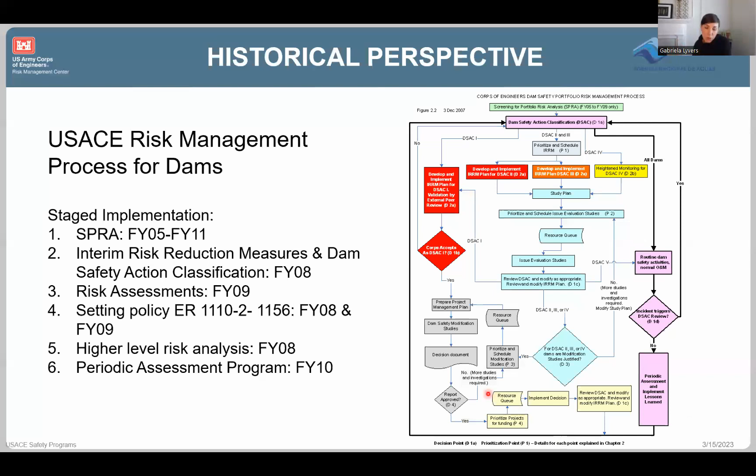So again, this flow chart, you can look at it. We can make these slides available to everybody. It really steps you through that process of managing your risk on a program level where you continuously assess your inventory of dams. For us, it was a 10-year cycle. And then you establish what the DSAC classification would be for that dam, which is the Dam Safety Action Classification, which allows you to rank the dams in level of priority so that you can prioritize actions, resources, funding, and higher level analysis.

So like I said, the purpose of the screening for portfolio risk analysis, I'm going to switch and call it SPRA from now on. The purpose of the SPRA was to perform a screening of all 715 Corps of Engineers dams to gather information and establish a relative ranking of risk within our portfolio.

Dams would be classified based on the Dam Safety Action Classification chart from a 1 to a 5, where the DSAC 1 dams would be of highest priority and highest risk, and the DSAC 5 dams were deemed to be a normal risk dam and of the lowest priority for action. This classification would allow us to determine future budgeting and resourcing needs, and would help us establish a program and an action for the years to come for the higher level of analysis, the periodic inspections and assessments, and all those follow-on action items.

All dams were screened with the same methodology. And today I'll go through the steps of what that entailed and how the Corps of Engineers used that information to make decisions.

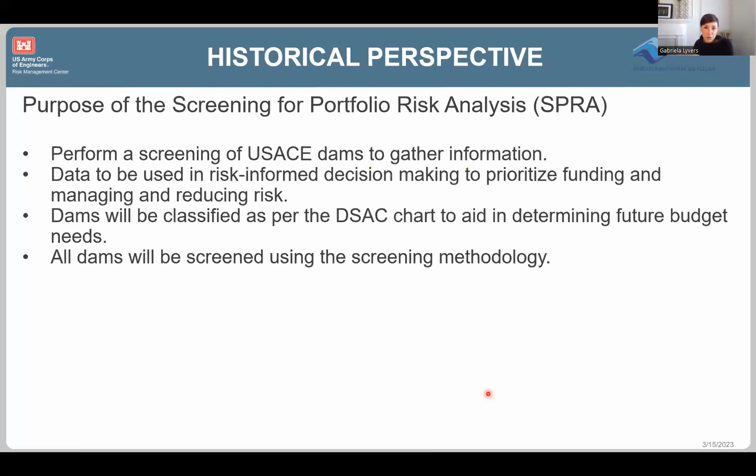DSACs 1, 2, and 3 are deemed to have a high enough risk within our inventory to require additional action. So anything classified as a DSAC 1, 2, or 3 within the Corps of Engineers portfolio requires a higher level of analysis, of risk evaluation.

One of the things I want to point out is that the process of classifying the dam can change with time. So when we started the screening, the SPRA process, everything was being evaluated at the same playing field. Every dam was being evaluated under the same spreadsheet, through the same methodology.

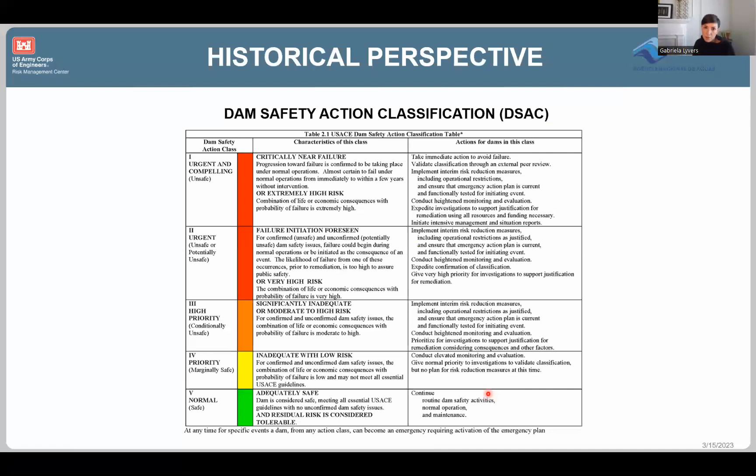So the outcome of the screening process was really a relative ranking in risk. What that means is that it wouldn't be applicable for me to compare the risk through the screening process of the USACE inventory and compare that to another inventory outside of our portfolio. So this was meant to be a relative prioritization. We have a process to do higher level risk analysis so that we can confirm the outcome of the screening process.

So in 2010, we started with the levee screening. We at the Corps of Engineers are also involved and have to do screenings of many levees, many miles of levees here in our nation. In 2010, we also established what the periodic assessment process would be within our portfolio. That was the ongoing evaluation of risk for our entire inventory.

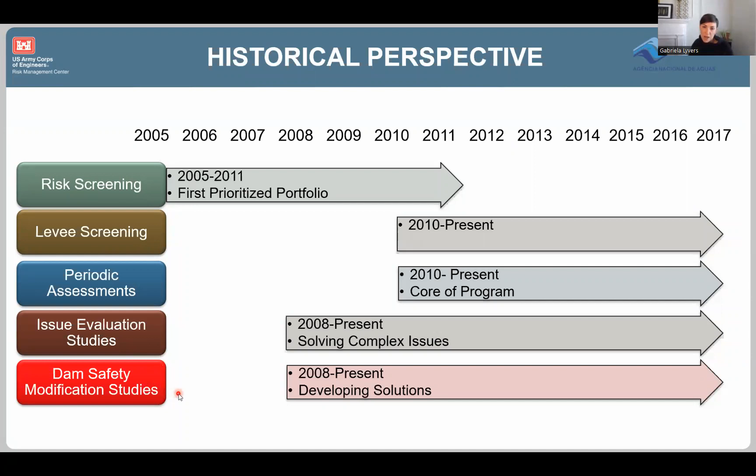And then in 2008, we started those higher level analyses that are required if we're going to go into a dam modification. So like I said, the screening is to establish that relative ranking and then to evaluate what the risk is and how you would reduce the risk through a modification of the dam. You would be required to do a higher level risk analysis, which we call an issue evaluation study, and then a dam safety modification study, where you actually evaluate how you would modify the dam, how you would rectify the issues at that dam, and how you're reducing risk.

One of the things probably highest on the list, and of course number one here, is that life safety is paramount. Life safety is really the biggest consideration we take when evaluating a dam. We don't want to increase the risk to the population that lives downstream of the dam just because the dam is there. So it was not appropriate to balance life safety with other benefits to the public that are there.

Because of the dam - so for example, recreation, or hydropower, or water supply. For the case of the Corps of Engineers, we established that life safety is the highest priority.

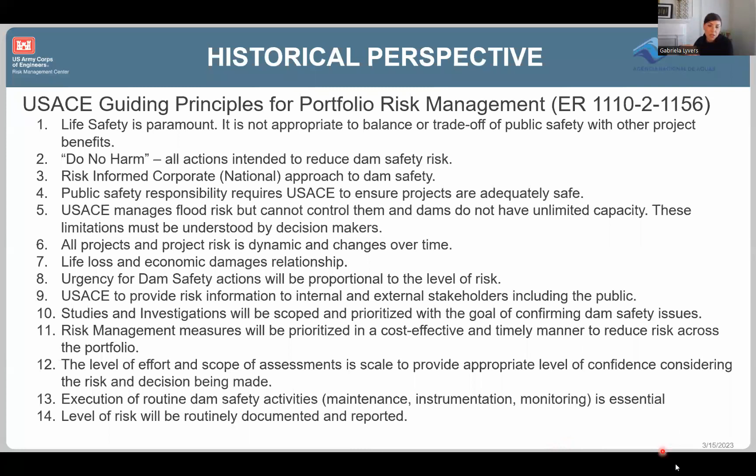Okay, so that is a lot of historic perspective, but I think it helps you understand the context in which the Corps of Engineers created this process for screening.

So what exactly is SPRA? It stands for Screening for Portfolio Risk Analysis. It provides a relative risk characterization of all the dams in our inventory. It's intended to be an initial rank of the dams based on the DSAC classification, 1 through 5, and it identifies which dams require additional analysis.

The way we evaluate the dams is based on risk, which is the probability that an event or load can occur—whether a hydrologic event, so a flood, or a seismic event—the probability of that loading, the probability of failure of the structure given that loading, the probability that the structure would breach, and then what happens, what are the consequences given that breach. In this case that's exposure and loss rate, which together equate consequences. I'll go into what these mean here in a little bit.

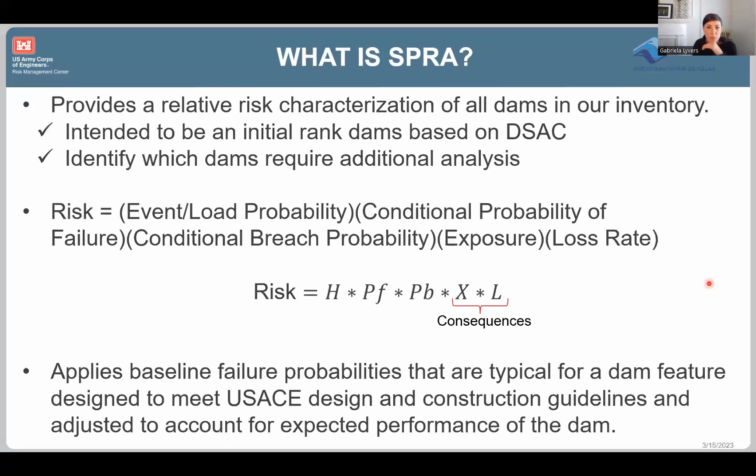So we established this methodology, and we used it to evaluate all of our dams. That included dams built for flood risk management, navigation dams—low head navigation dams that don't see a big head differential throughout the year—and high head navigation dams that we have in the western side of the country.

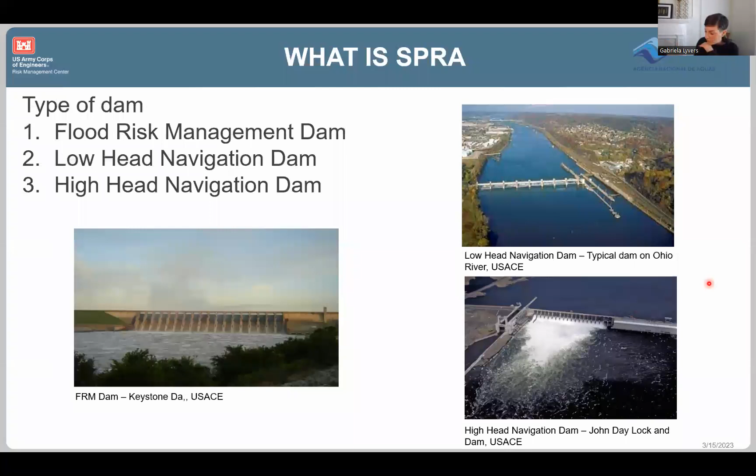So there were 6 steps required for this process. The first was establishing the rates and the probabilities of those initiating events, so the loading, whether it's hydrologic or seismic. Then we needed to also look at the structure behavior, and we did that through what we called engineering rating data, and I'll explain that here in a minute. I'll go step by step through these, explaining these further.

And then once we had the structure behavior evaluated, we determined what our expected dam breach would be and evaluation of the breach severity. And then we evaluated what the loss of life and economic consequences would be given that breach. Then we compiled all that information to complete the risk assessment for that individual dam.

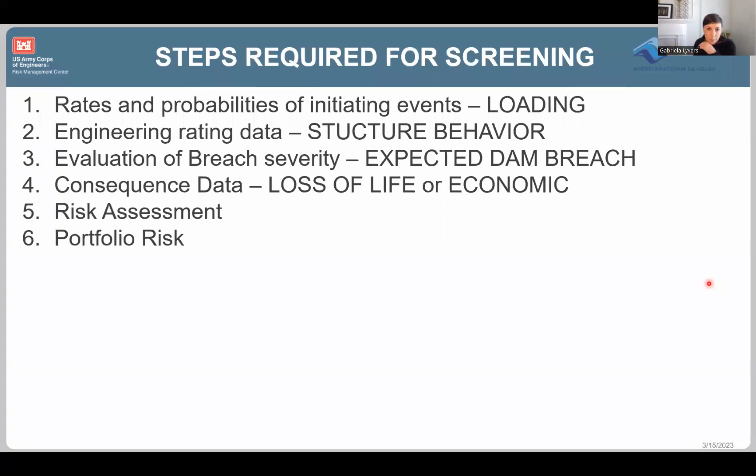And then that information was rolled up to a national database where we could evaluate it from a portfolio perspective. So that's when we would compare the relative ranking of our dams and be able to make decisions of how to prioritize the actions for our inventory. So like I said, I'm going to go through all these steps again.

those events could be different depending on your inventory. For us, it was hydrologic and seismic is what we were evaluating our structures against. Then, like I said, you evaluate the structure components through the failure mode probabilities. You evaluate the consequences, and then you calculate what the risk is for the project.

All right, so step one, the hazard, the loading, the initiating event. So we looked at 5 different loading events. The first was a normal water level. So this was a hydrologic event, a pool range with a return period of 1 to 10 years. Then we also looked at an unusual water level event, which was a pool range with a return period of 10 to 300 years. And then an extreme water level event, which was a pool loading with a return period of 300 to 10,000 years.

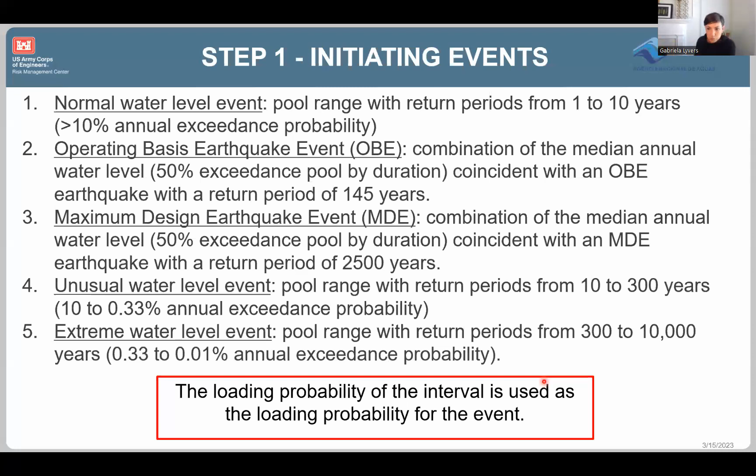All right, step 2, the engineering rating data. So this was a subjective evaluation based on existing information. So the team that would do the screening would go to the site, read through all the background information, and then based on engineering judgment, based on the information that was provided, based on their experience as dam engineers and risk evaluators, they looked at each project component and established a performance given the loading.

So for example, if I had, let's say, a normal pool like I had in the previous slide, then I would evaluate each dam component from a performance perspective. So there were four levels that you could choose from. So you could say that the component was adequate. What that meant is that it was judged to perform well under the specified loading condition with a high level of confidence based on existing data, analysis, or project characteristics. So it was judged to meet current engineering guidelines and criteria.

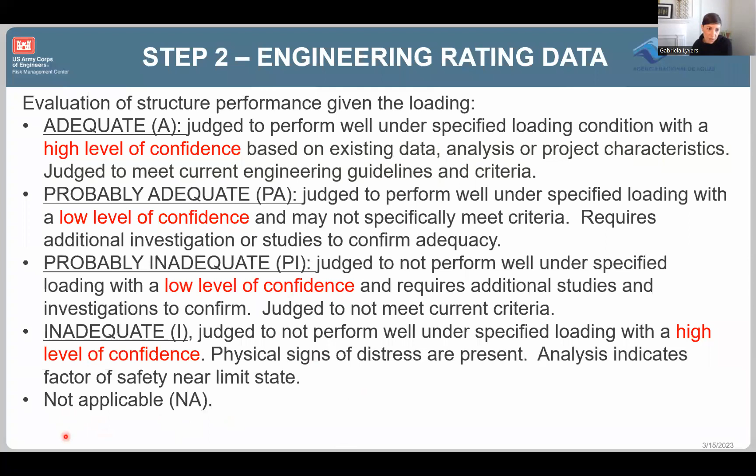And then the last one was inadequate. So judged to not perform well under the specified loading with a high level of confidence. So they were pretty sure that it would not be able to survive the expected loading. And I'll explain all of this a little bit more. I know this is a lot to take in. And then there was another that it was not applicable. So maybe if you didn't have that certain component in the dam.

spreadsheet. If you were looking at a low head navigation dam, like in one of our rivers, you would look at the low head navigation spreadsheet. Or if you would look at a navigation dam out west, one of these high head navigation dams, you would have to switch to a different spreadsheet. And the reason for that is because the project components were already in the spreadsheet and they would change depending on the type of the dam.

So what you would do is you would take this spreadsheet, find the component that you wanted to evaluate. So in this case, this example has a concrete gravity section. And you would evaluate it for external stability, internal stability, foundation stability, and foundation seepage and piping. And then you would establish whether you felt it was adequate, probably inadequate, or inadequate, based on each of the 5 loading criteria.

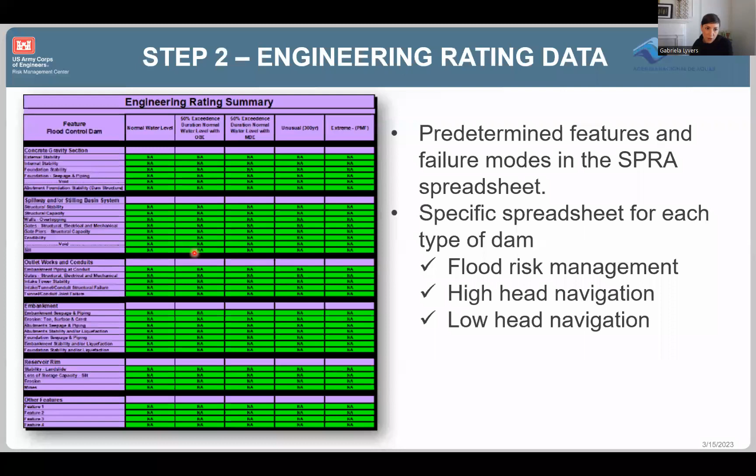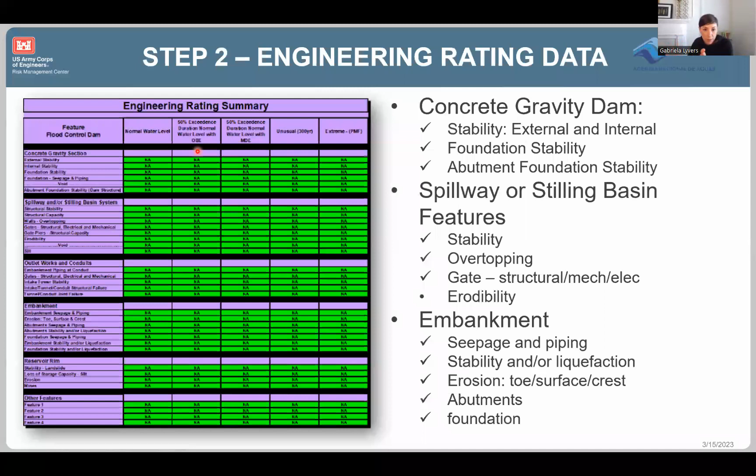So each type of dam had different features that were predetermined and loaded onto the spreadsheet. So like I said, for a concrete gravity dam, you would be looking at a certain number of failure modes. For an embankment dam, you would be looking at other failure modes such as seepage and piping, stability under liquefaction, erosion. You would be looking at the abutments and the foundation. If you had a spillway, you would be looking at stability and gate operability and mechanical components. So you did have to think about exactly what the features at the dam were going to be, and use the appropriate spreadsheet.

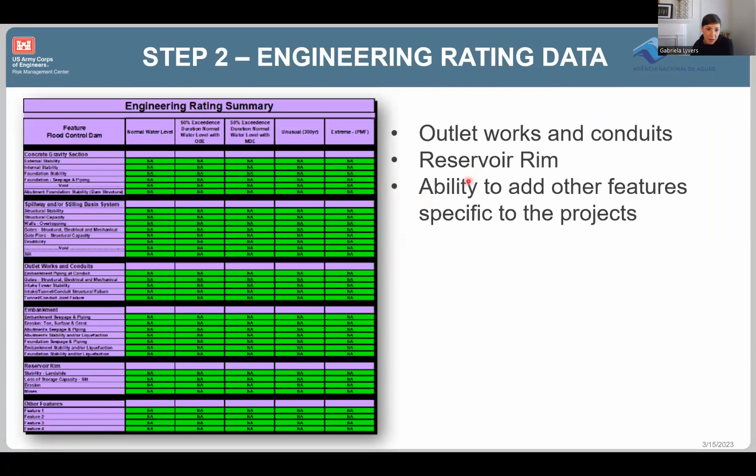So like I said, this is based on engineering judgment, based on information that was available at the site. Some projects had more information than others. So you had to make sure that you had an experienced team that was evaluating the information that was available and making this determination. All right, so here, let me go back a little bit. So here we evaluated what the engineering team decided was the performance of the structure. Like, how would the structure perform under the loading that was expected, right?

So those 5 different loading scenarios were evaluated for our entire inventory. This next slide is that, so a few minutes ago, I said that this spreadsheet established a baseline probability of failure for each project component. So the way that this worked is that you would start off with a base probability for that component. And then based on the performance that was established by the team, that baseline probability was modified.

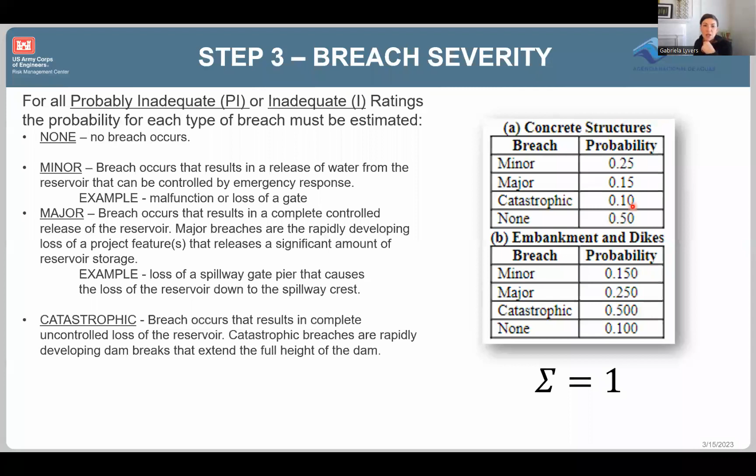So this was in a spreadsheet with some suggested probabilities for each component. For example, you had suggested probabilities for a concrete structure and for an embankment, and the team could adjust these probabilities, but what we would ask is that there had to be justification to make those changes. It wouldn't be something that you would automatically just change. There had to be a justification, an explanation. And if you didn't have that, you should just use the default values.

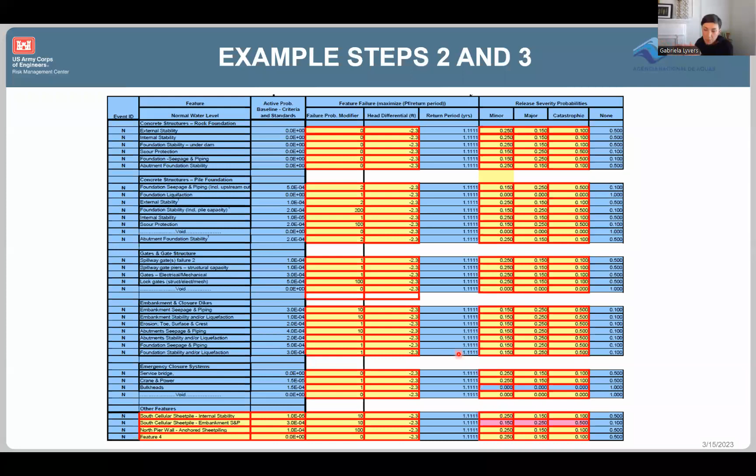All right, step 4 is consequences. So we do evaluate life loss and economic damages to property and the project. Although, like I mentioned, life safety is paramount, so the decisions for action and prioritization are based on life safety. The economic damages were based on historic data or flood damage reduction studies, so that was all existing information we already had for each of our dams.

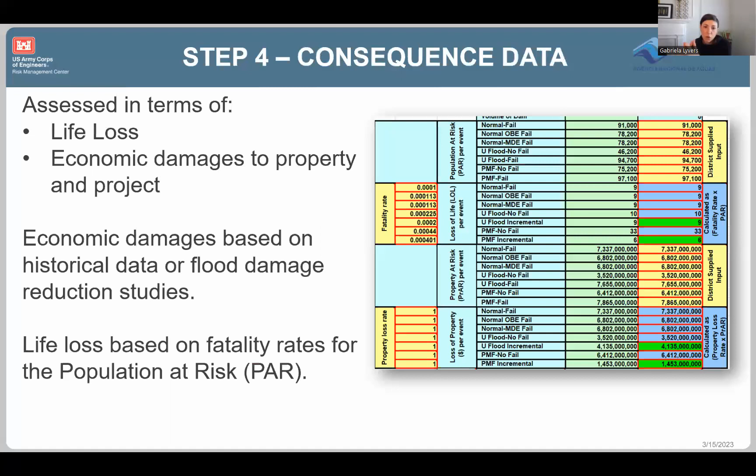And then the life loss was based on fatality rates for the population at risk. I'll explain that here in just a little bit. So the way that we did our life loss estimates for the screening is that it was based on dam break studies and inundation mapping for sunny day and flood events.

So what that means: the sunny day event would be like a normal pool, and you have a failure of the dam or dam component that leads to a breach and inundation downstream. So that's the sunny day. And then a flood event would be an event where you have something that has led to a higher pool within your structure, and you have poor performance of your component, you breach, and then you have an inundation downstream.

So life loss can be estimated using predetermined fatality rates. I have just the table that was used back then when we did it for the Corps, or site-specific information if it was available for that dam. But it was not common that we had site-specific information for every dam we evaluated. So we would look at information based on this table here, based on flood severity, based on warning time, and based on the understanding of the severity of the flood by the population downstream. And then that gave you suggested fatality rates that you would multiply by the population at risk.

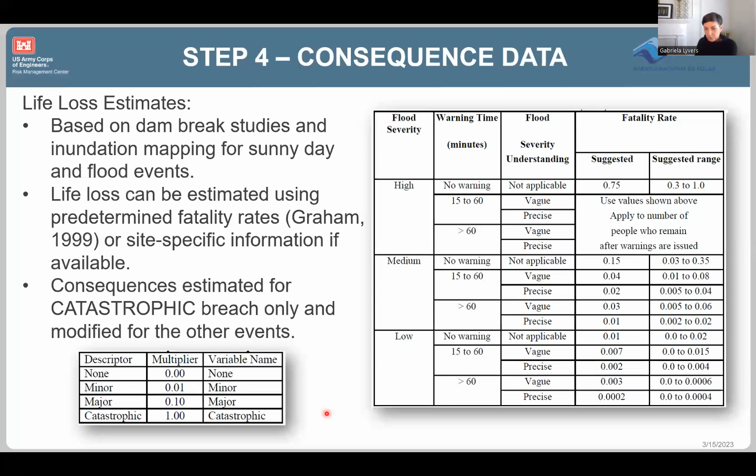So consequences were estimated for the catastrophic breach only, and then it was modified for other events, using those multipliers. We would establish what the life loss consequences were when we had a catastrophic failure, so that had a modifier of 1, but then the consequences were reduced if we had a major breach severity or a minor breach severity. And again, this was all within the spreadsheet.

But I think when you see the process we went through, you can better understand why this is a relative ranking. Some of it is subjective, some is determined by these modifiers, some is determined by these methodologies of using tables to establish fatality rates. So all of those assumptions can change under a higher level risk analysis, but to start, you need to know how to evaluate your inventory when you have that many dams. This was used so we could have a relative ranking of our portfolio, then go into those that were the highest risk dams and evaluate further for more precise information.

All right, so step 5 was the risk assessment. Conditional failure probability for each load case are automatically computed by the spreadsheet. And then the spreadsheet would calculate an annual life loss and economic consequences for each branch, and then added to the total risk of the project.

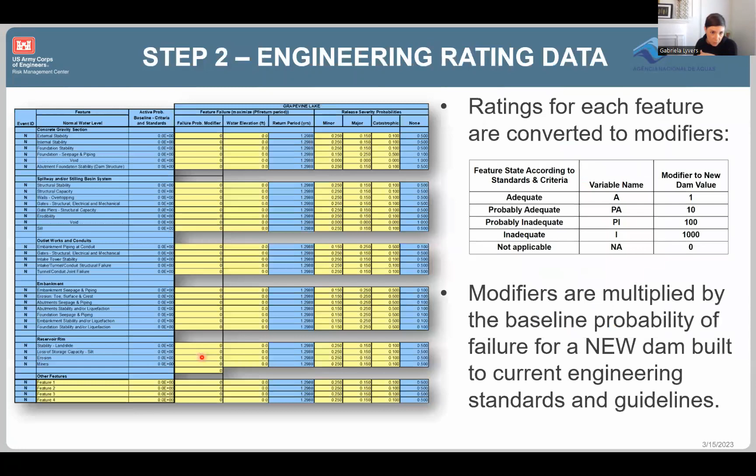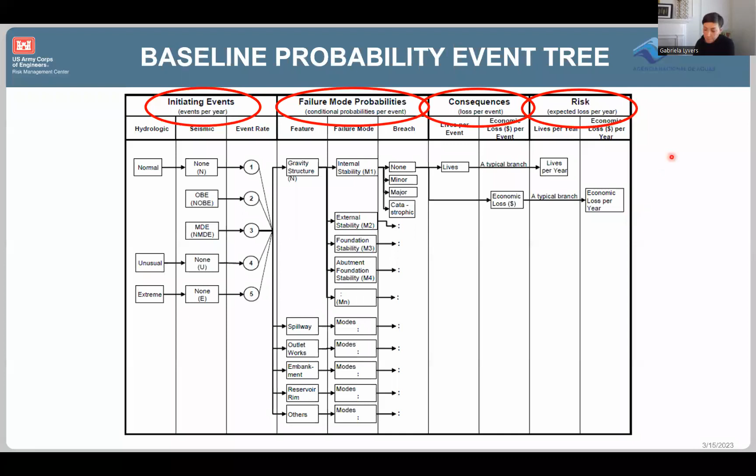So I'm going to go back here a little bit. Sorry about this, I probably should have copied it in. So that's this down here, where everything is being multiplied and added so that you can calculate the total risk for the project and the annual life lost.

All right, and again, this was done by the spreadsheet. It was all just automatically calculated once you went in and added all the information for all the steps previous to this step 5.

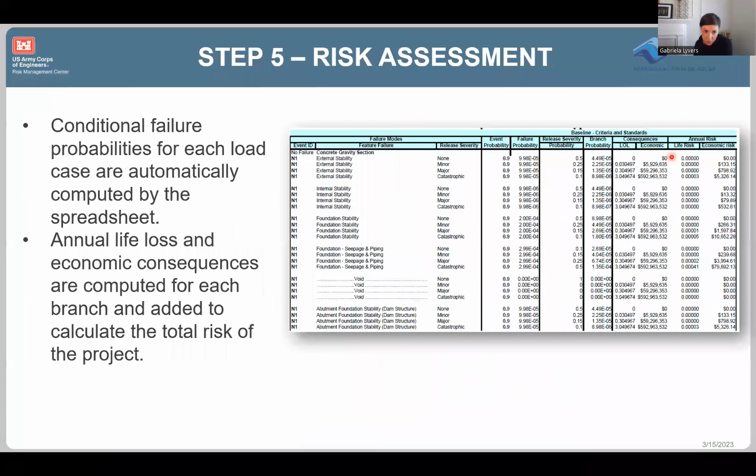And then what the spreadsheet would give you is your life and economic annual risks. So in this case, red is life safety risk, and green is the economic risk.

Here on the right is the normalized life safety risk and the normalized economic risk, and the color coding is the load cases. This gives you an ability to see what is driving your risk. Is your risk driven by more extreme load cases, a normal load case, or an unusual load case? So it can tell you where the risk is coming from for your dam.

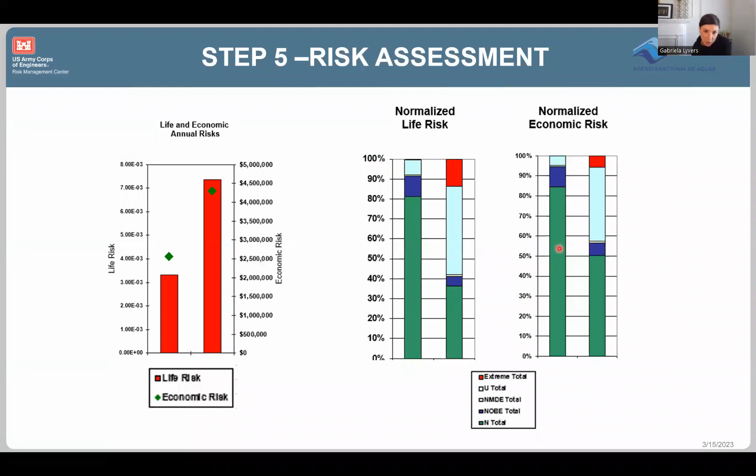All right, so the way the Corps did it is that every year they had a roll up. They called it a roll up. They had this meeting where they looked at all the results from that year from all the screenings, and then evaluated them for consistency. That team that did the roll up was a multidiscipline team with multiple districts.

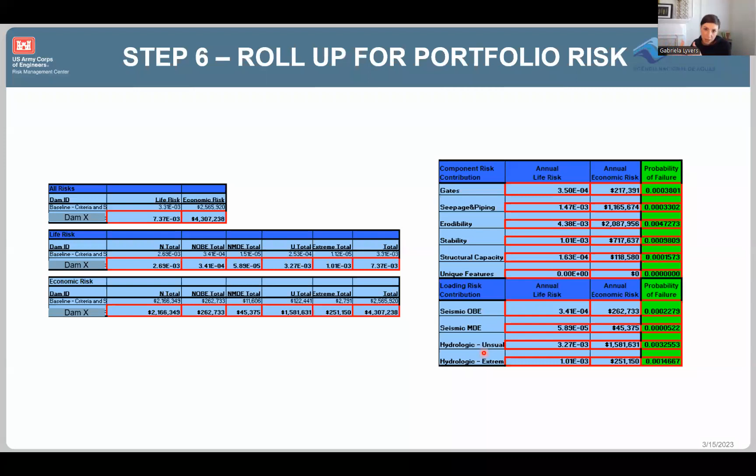So multiple of those regional offices, senior leaders within the Risk Management Center and headquarters evaluated the screenings that had been done that year for consistency, and also to look at the portfolio to evaluate and make decisions.

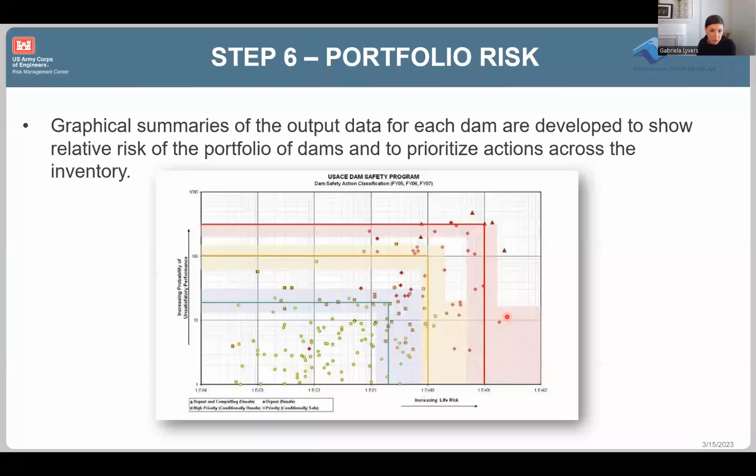All right, so I know that was a lot, and we'll provide these slides and some more information, but I wanted to give you an idea of how we did this on a national perspective and how we kept it consistent within the teams and different regions of the Corps of Engineers. A lot of it was built into the spreadsheet using modifiers based on information the engineering team was providing. But there were also some things the Corps did from a national perspective to establish this kind of program, and I want to go through some of these here in this slide.

So the Corps implemented a national group to manage portfolio risk. That's how the Risk Management Center was born within the Corps of Engineers. It's kind of an arm of headquarters, and they support headquarters decision making. They provide advice to headquarters, and are not attached to any of the regional offices. So, we were making this big shift, going from a regional perspective to a national perspective. It was important to the Corps to have an unbiased group of people able to manage this process. That's kind of how the Risk Management Center came to be.

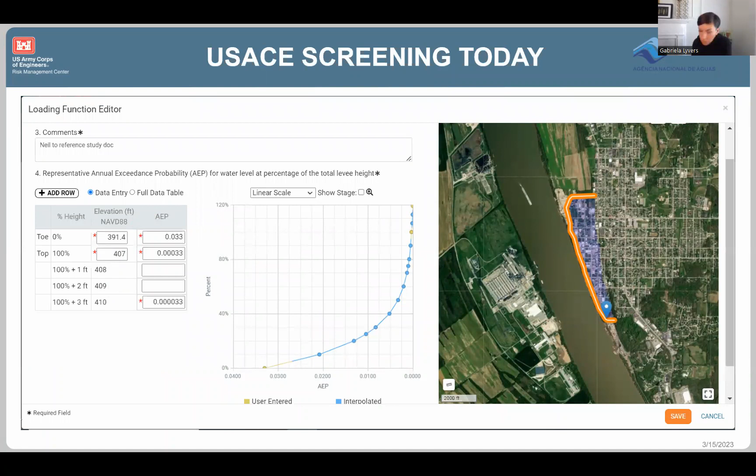Here you have a screen where you're putting in the loading information. The next screen is where you put in consequences. So it's set up as tables where you can just do data entry. The user can put in the data themselves.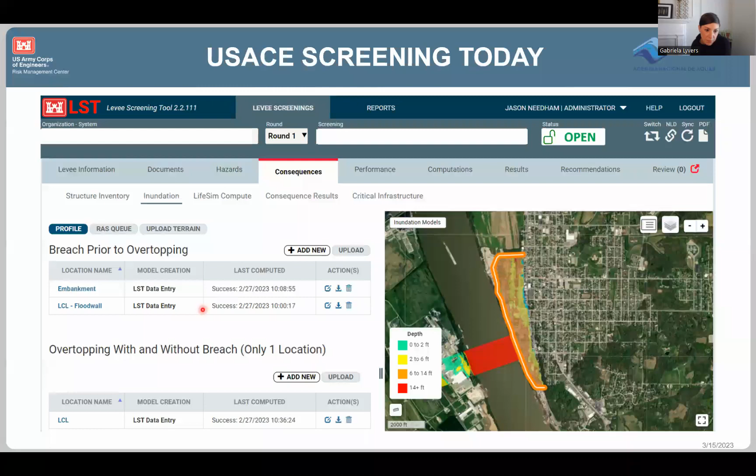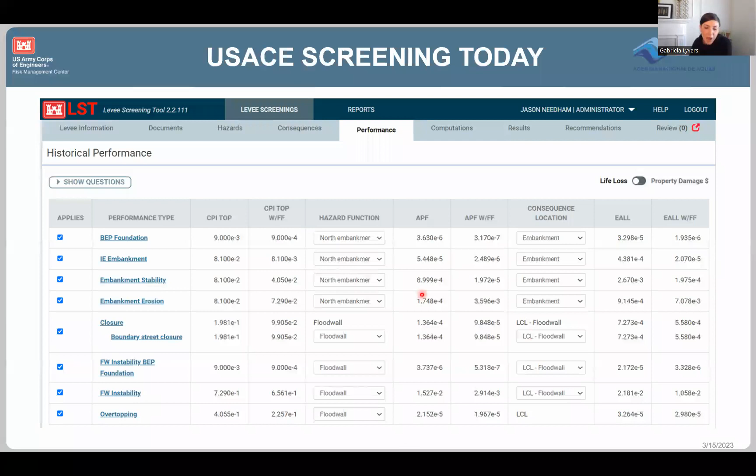Here you have the performance, and again, it's set up where you have different failure modes related to different parts of the dam or the levee in this case. You could have a baseline probability like we showed you on the spreadsheet. Here they have the annual probability of failure, the consequence location, so this can be made applicable, I should say, for the dam safety side. And then it does all the calculations for breach, and it ranges in that breach severity and the loss of life. And then it summarizes all the information for all the failure modes evaluated.

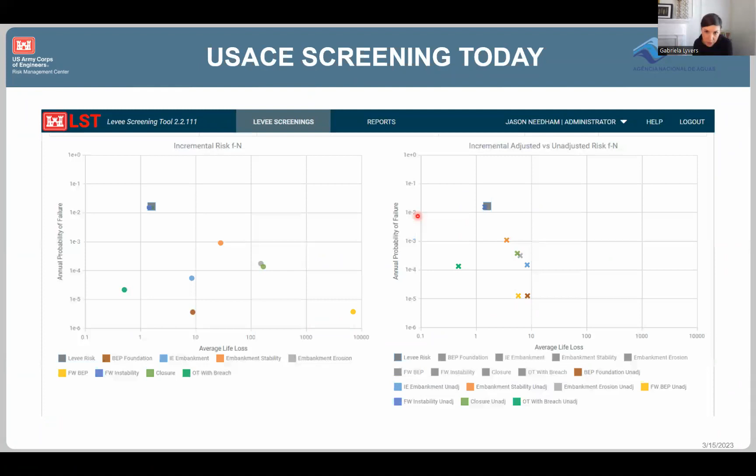So again, this is just an example of what we would likely do today if we were going through this process. Although the spreadsheet worked well, it was a successful program that really led us to where we are today in risk evaluation. And it really established the starting point, like I said, for us to be able to rank our dams and be able to prioritize decisions for the inventory.

So the reason why we wanted to give this presentation is because we have this collaboration with ANA, and we're in the process right now of literature review and really understanding the dam safety guidelines that you have nationally, and your dam hazard classifications. And then ANA has asked us to establish a similar methodology and criteria for screening of dams, so that it could be used internally to prioritize funding, action, resources, really whatever decision you need to make as an agency to prioritize action.

So we wanted to present what we did in the Corps as an example, but of course, the way that it was established in the Corps, it really represented the needs that we had as an agency and in the inventory that we had. So it's really important for us to understand the needs that ANA has, the needs that the inventory has, and really the struggle as a dam safety program that we would really want to remediate through this process.

So again, we're doing this literature review so that we can establish this methodology. We're going to develop some kind of screening spreadsheet program or process and a documentation to go with it. And then the plan is to do an in-country case study of the screening methodology and the outcome.

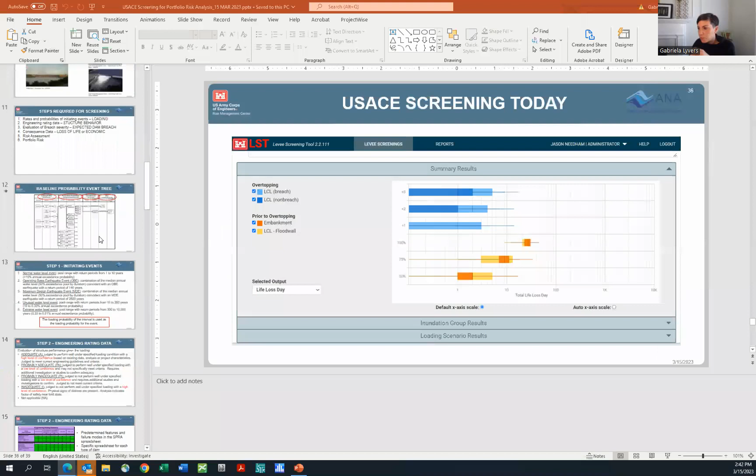So you could add features for different considerations that are specific to certain projects if you needed to. But we kept this above portion to be the most common features and issues at all of our structures.

So I think that was all the questions, Tawana.

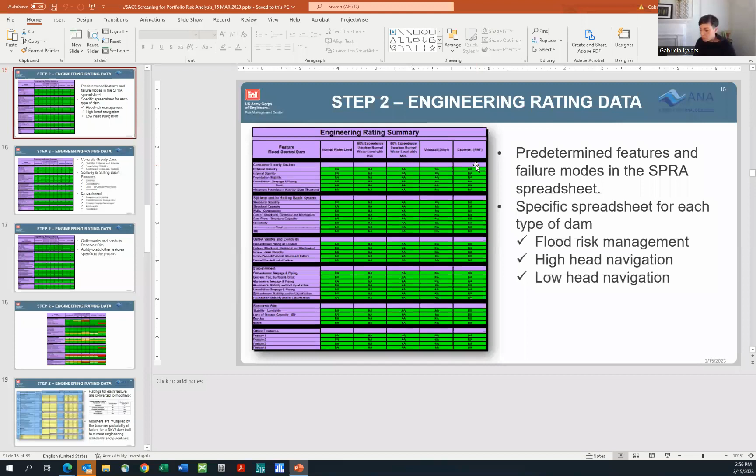What do I think of ALARP, as low as reasonably practicable? We evaluate our dams against the tolerable risk guidelines, and once we get them below the tolerable risk guideline, that's when as low as reasonably practicable comes into play - how much you reduce risk based on the cost of implementing those risk reduction measures. There are criteria that we follow, documented within our guidance. We use it under specific considerations, mostly when we're implementing modifications.